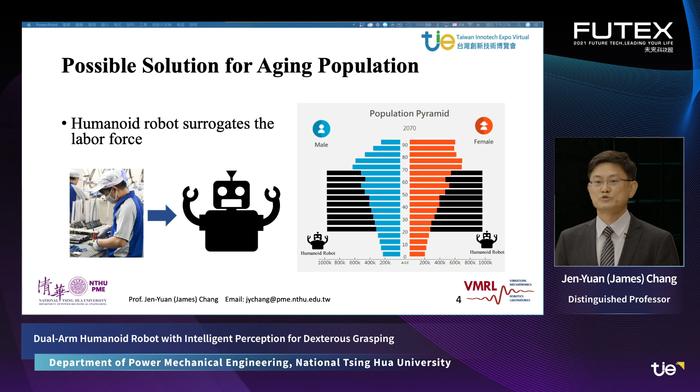Right now in the factory, we use humans as operators. However, because the society will become very old in Taiwan four years from now, it is possible to use robots to replace the human labor force in the factory. With the introduction of the human-like robot in the labor market, we can address this shortage of labor in the economic domain.

Not only the factory or industry is facing a shortage of labor, but there's also been a recent increase in COVID-19 worldwide. There's a lot of demand for using robots to replace humans, especially in the hospital environment. Why is that? Because one COVID-19 carrier can infect 5 people, and medical protection is very important nowadays. We use the robot to replace tedious labor work in the hospital environment, and we can prevent the spread of infectious viruses in our society.

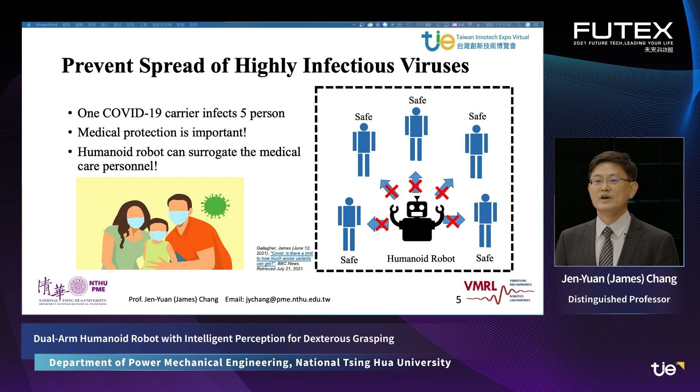Here's a breakdown of the special features of our human-like robot. First of all, just like a human, we designed the robot like a Star Wars trooper, just for fun. The size of the robot is more like me, and the weight is about 80 kilograms. The robot has a vision system with a human-like head that can move 360 degrees.

The robot also has a robotic arm, different from the traditional 6 degrees of freedom robotic arm. We have a 7 degrees of freedom, or 7-axis, robotic arm that can reach anywhere with a different orientation for grasping the object.

As for the hand of the robotic arm, our design is more like a human hand, quite different from the traditional robotic design where grippers simply open and close like chopsticks. Our robot is equipped with a grasping device like a human hand: a 5-finger robotic hand with a soft robotic actuator and an adaptive design in the structure.

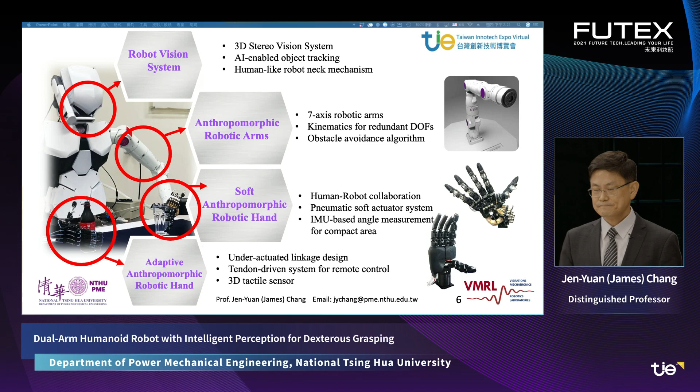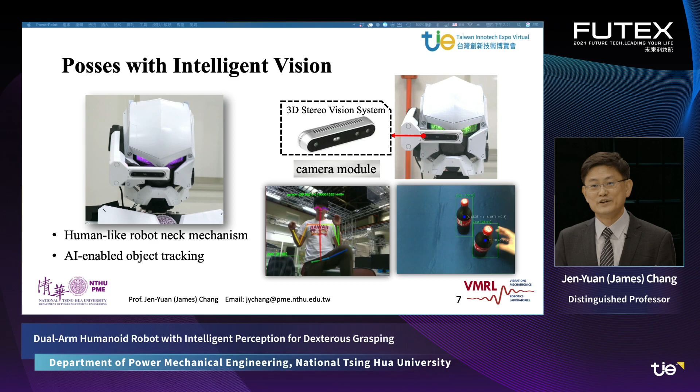I'd like to introduce you to the robot intelligence vision system. As you can see, the robot can move its head freely, and at the same time capture images. The image is not only 2D, but also 3D, meaning I can measure the distance between the object and robot. With AI algorithms embedded in the computer inside the robot, we can track different objects and recognize even the human skeleton in real time.

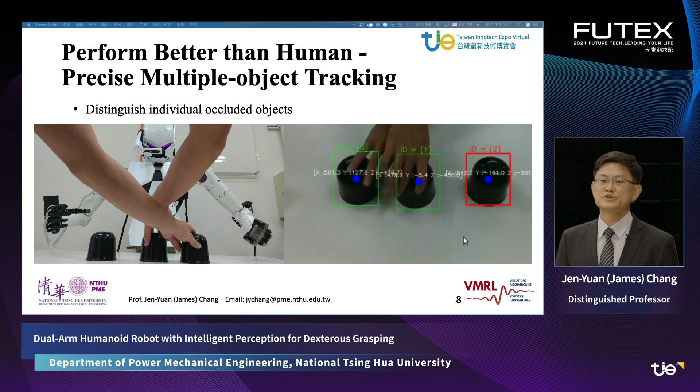The robot can track multiple objects, and I think it's quite interesting because the robot can replace human work, but can perform better than a human. For example, the robot can track multiple objects at the same time, so this can be used in the security area and also in hospitals.

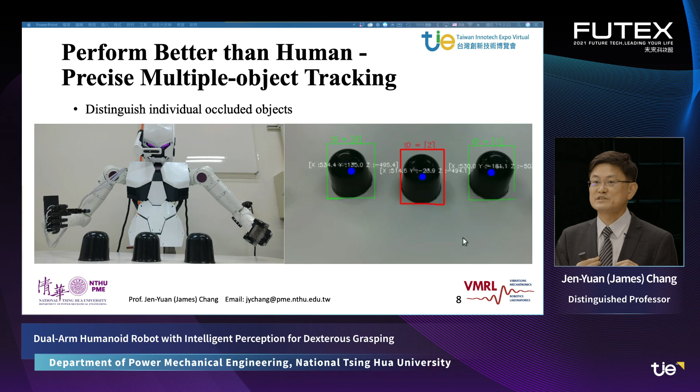Why is this so interesting? Most of the time, our traditional robot has a 6 degrees of freedom design. With 7 degrees of freedom, just like you can fix this point, your arm can actually have different orientations. With a traditional 6 degrees of freedom design, it can only have one orientation. With this kind of 7-axis, 7 degrees of freedom design, we can mimic human motion.

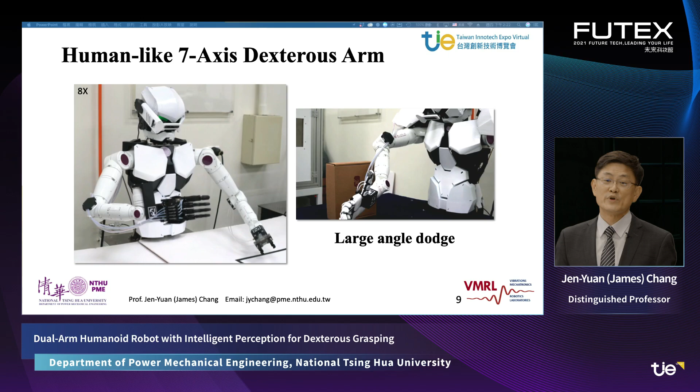Into the application, to be able to teach the robot to perform human motion, we have this US patented technology we call IMU, in which we can measure the angle and orientation at the same time for different objects and different linkages.

You can see we have this data glove and a sensor array. We can measure any pose and any orientation of the human hand. The application is that we can digitize human motion and transfer it to the AI system and train it, so it can evolve different technology and knowledge, and also preserve experienced workers' hand motion.

For example, for medical applications, you can also teach the robot using medical personnel to perform some sort of dexterous work in the hospital environment.

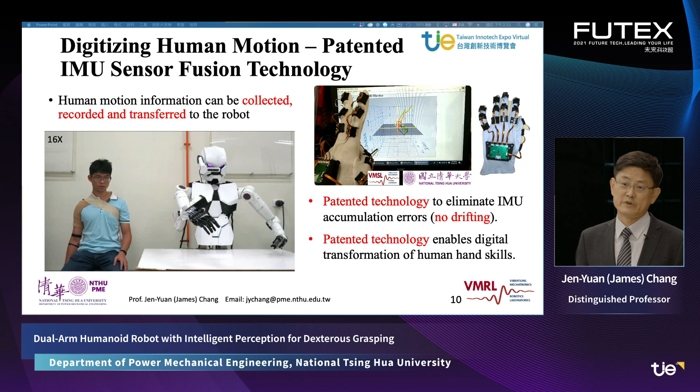In our robot, we also have soft actuators. Safety is the first priority. With the soft actuator in the robotic hand, you can shake hands with the robot just like with a human. Inside the robotic hand, we have a sensor to measure this kind of motion and also perform open and close motions, just like a human.

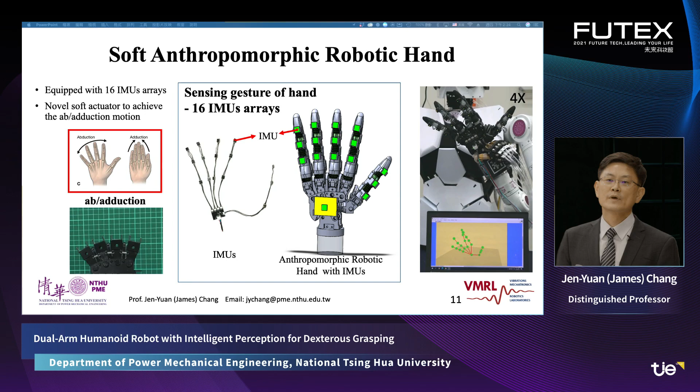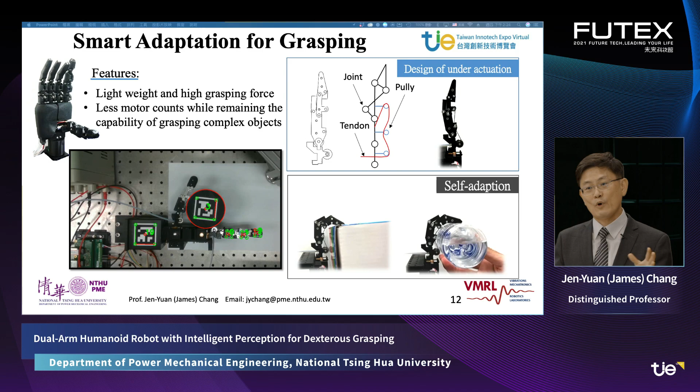With the adaptive design in our structure, we can use one motor to pull the tendon to move the finger of the robot hand and grasp any object. Traditionally, you only have open and close, but now our robotic hand can grasp any object like a human. While grasping different objects, the robot hand is also equipped with a sensor inside.

So basically, we can grasp objects with a feeling. This sensor uses magnetic sensors, and it can measure force in 3 dimensions at the same time. We can use this technology to know the weight of a glass you're going to hold, even while putting water inside the glass.

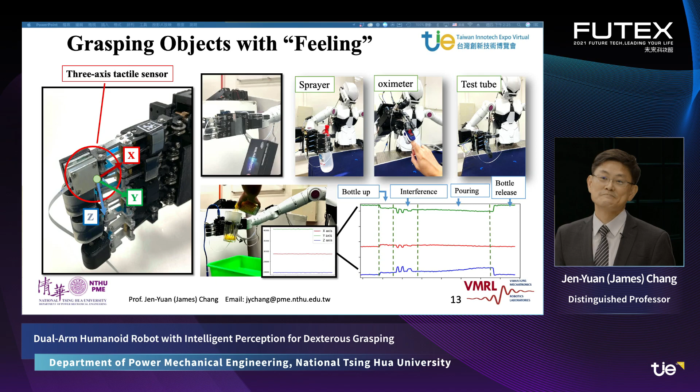As I was talking about, safety is the first priority. Our robot has an embedded AI system that can check different objects, and at the same time has this automatic, very smart non-contact obstacle avoidance technology to prevent contact between the human and the robot.

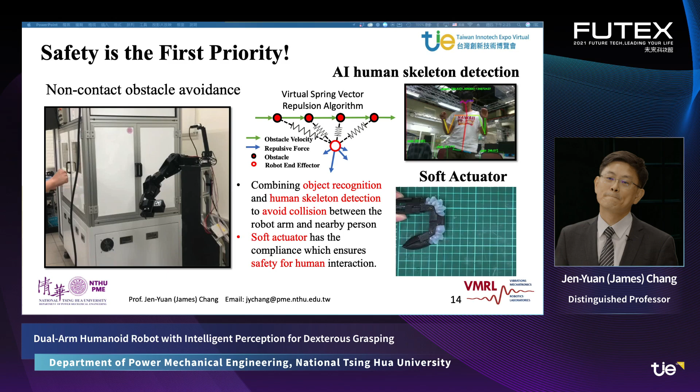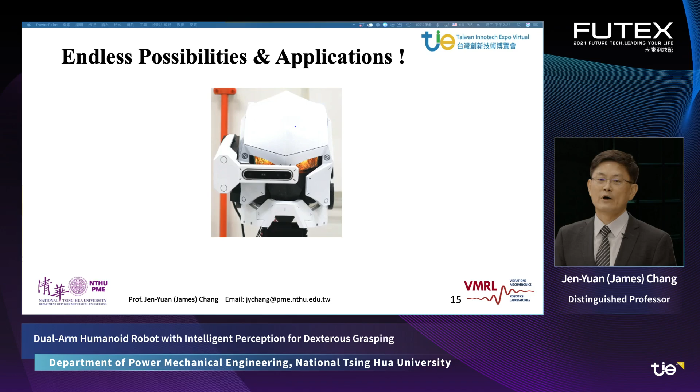There are lots of different features in our human-like robot, and I believe there's an endless possibility of applications. For example, it can be used in daily life, in the factory, in security or military, and also in the hospital environment to prevent the spread of COVID-19.